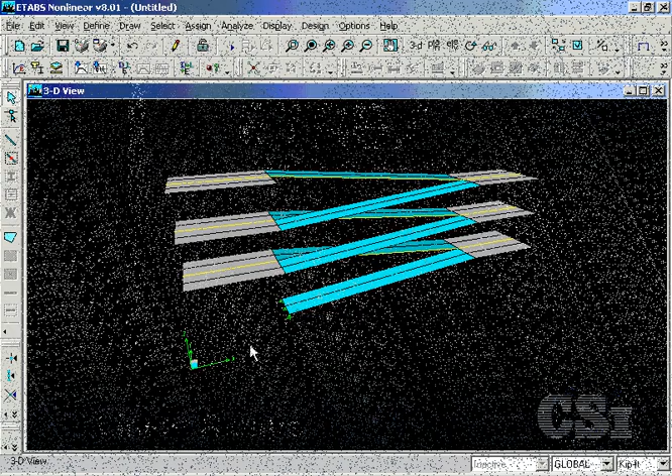This tutorial will show how easy it is to create linear ramps for parking garages in ETABS. We will create a 6-story ramp, 1 lane wide, with a 1 in 10 slope.

Start by defining a grid that will allow the geometry of the ramps to be easily modeled. Set the grid lines in the X direction to 10, the Y grid lines to 5, and the stories to 6. Click on Grid Only.

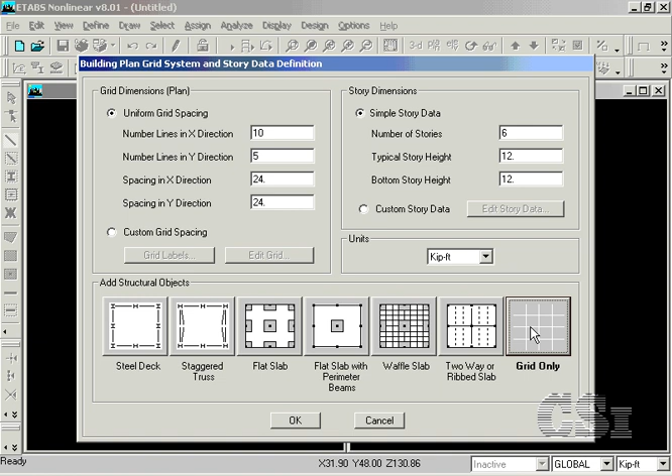We will reduce our view to one window and change the view to an elevation along grid line 3.

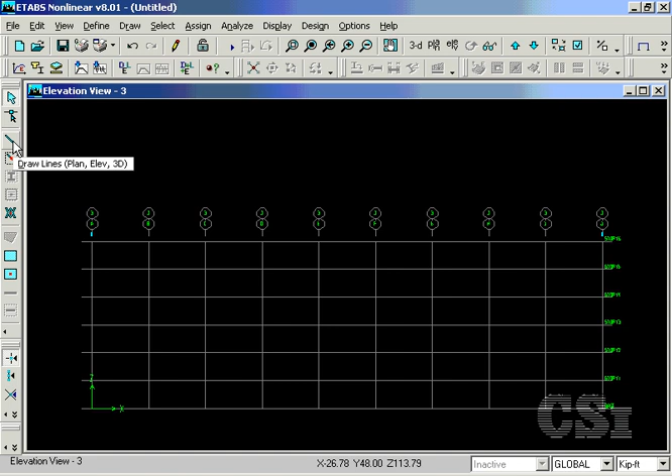Next, click on the Draw Lines button, and using the Snap to Points option, start to draw in the ramps. Keep in mind that we are drawing lines and not area objects to model the ramps at this time.

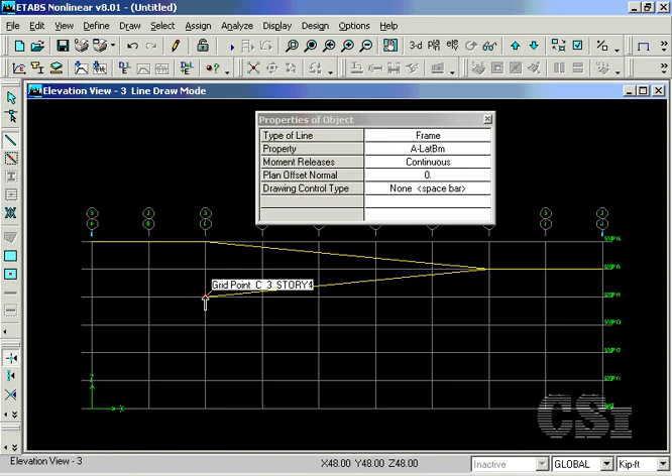Once we have drawn one iteration of the ramps, we may use the Replicate command to position ramps at the lower stories. Select the ramp that slopes down from the left to right and replicate at stories 4 and 2. You may select more than one story using the Control key.

Select the ramps that slope down from the right to left and replicate at stories 3 and 1.

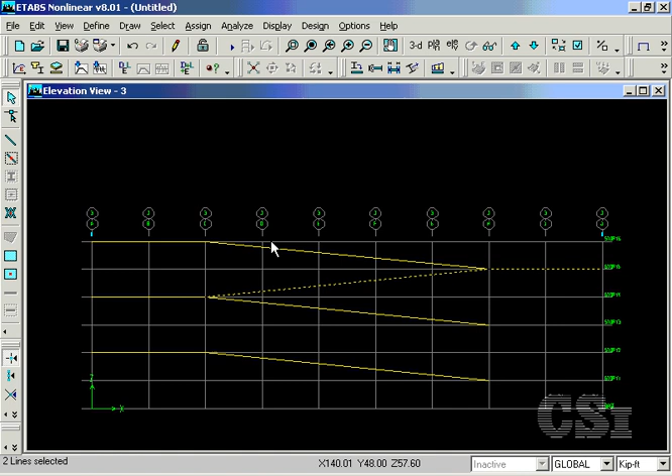Next, set the units to feet, and then open a second window so that we may have a better view of the model as we work.

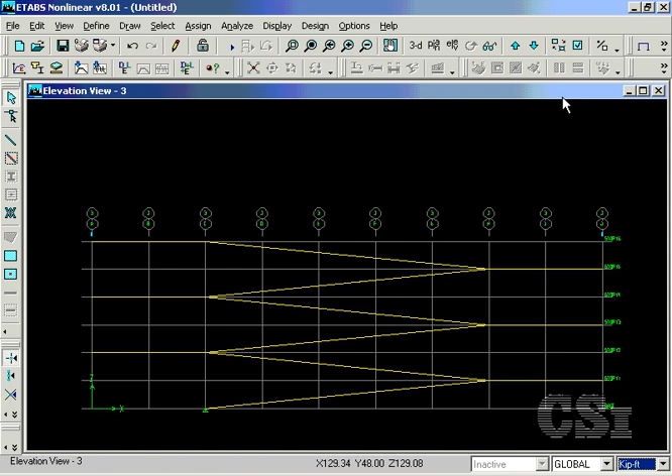On the 3D view, shut off the grid so that the ramps are more visible.

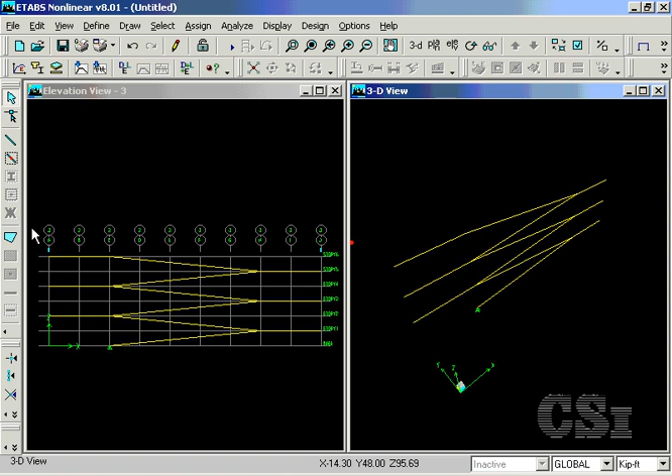Make sure that the select mode is on and turn off the snap option to allow easier object selection. Box around the entire elevation view to select all of the objects, and then deselect the ramps sloping down from right to left.

The next step is the key to modeling ramps. Under the Edit menu, select the Extrude Lines to Areas and set dy to 10 feet. This will extrude an area element 10 feet wide from our line edge.

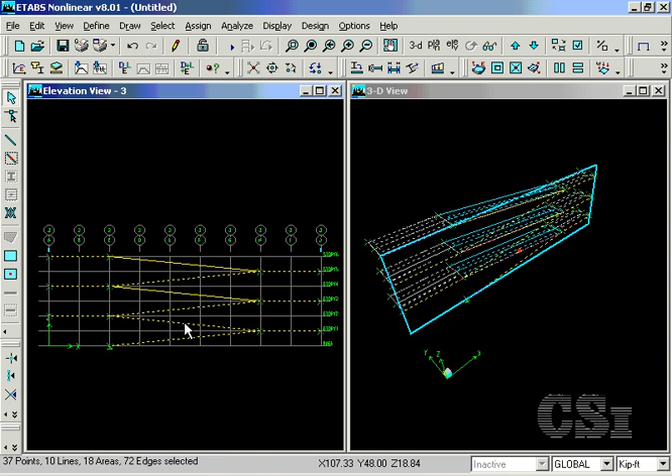Select All once again, and this time deselect the ramp sloping down from left to right. Again, click on the Extrude Lines to Areas command, only this time set dy to -10 to generate a pattern of alternating geometry.

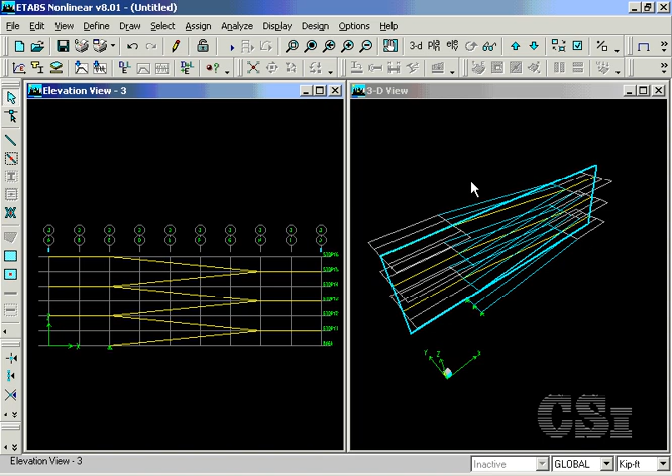To get a better view of the ramp we just created, activate the 3D view and through the Set Building View Options command, click on the Object Fill box.

Shut down the elevation view, and you can see on the 3D view how the ramps descend down the garage. This concludes this tutorial.